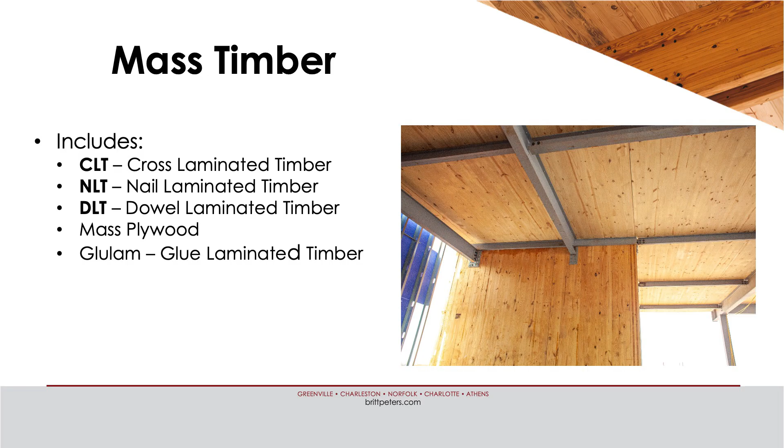So when I put this together, I don't think Laura was scheduled to speak, so she did a much better job than I'm going to do. I'm not going to rehash what she just said. But so what is mass timber? She went through a long slide of that, and I may throw in some additional facts. So skip some of this. So right now, again, maybe a little dated.

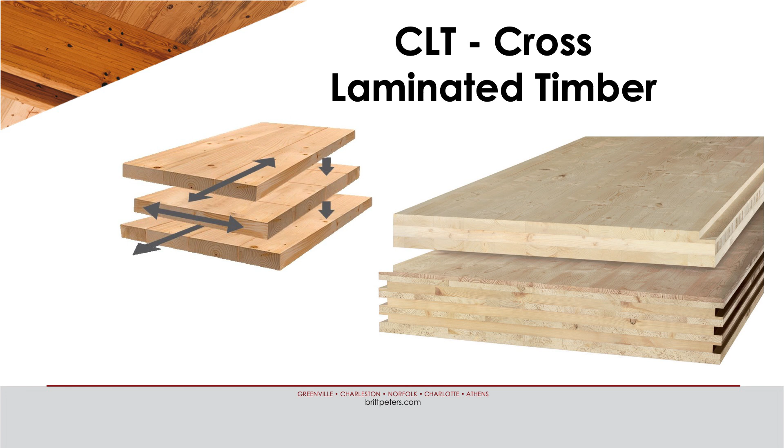So cross-laminated timber, she did a great job of explaining that. One benefit of CLT is the dimensional stability, unlike NLT, DLT, or what we deal with in stick framing. When I say dimensional stability, it means wood wants to shrink, especially perpendicular to its grain. So by alternating the layups, the panels do not shrink nearly as much as NLT or DLT.

And you can see it in the detailing. You'll see with an NLT panel or DLT, there'll actually be gaps that are left for that shrinking and expansion that you don't get with CLT. So we can actually butt them up next to each other and create the joints.

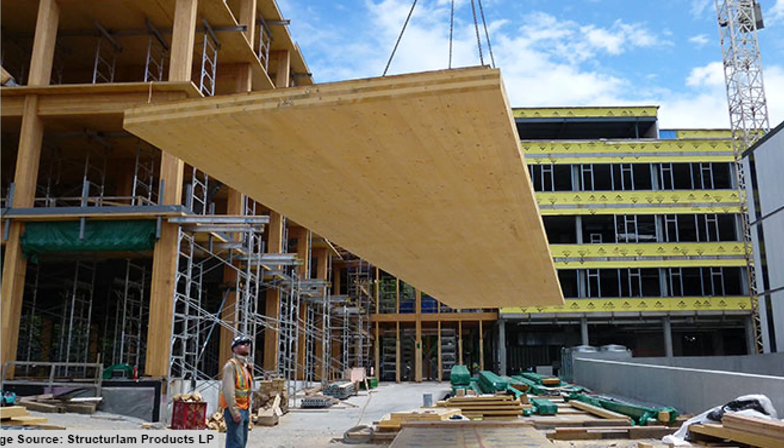They're large panels, or they can be, so up to about 12 feet, and you said 60 feet. And it's not every manufacturer. I think SmartLam is right at 50 right now, maybe just over, depending on their plant. But you know, they're large panels lifted in place.

NLT and DLT, I think we have one NLT project, and you know, a framer on site, you may not like the quality, but could put together NLT panels on site with a jig on the ground and lift them into place. We have one that we've done, and I'll go over it.

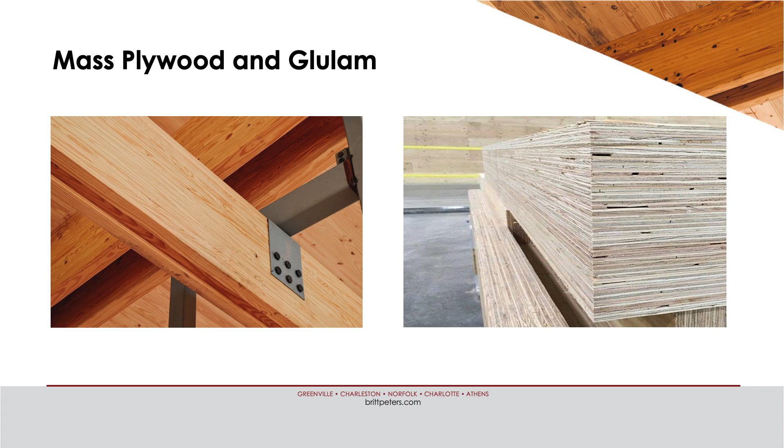Glulam and mass plywood. So I do think SmartLam has recently expanded their capabilities for their glulam, and they were offering to price a project with the floor panels being glulam and not CLT, just to look at the cost difference, because they can be a lot deeper now.

So now we'll jump into use in the Southeast. So I picked a handful of projects that we've done or been involved with in some capacity, just to show what is going on in this region. You know, Matt said we're lagging, but I think we're trying to quickly catch up. These projects date back to design probably around 2015-ish.

And one of our first is going to be the Calvary Chapel in Chattanooga, Tennessee. So this project, 8,500 square feet, small footprint. The contractor owner, I want to say they had 3 to 4 people on site that were working on this. They wanted to keep the workforce small. And this was full CLT.

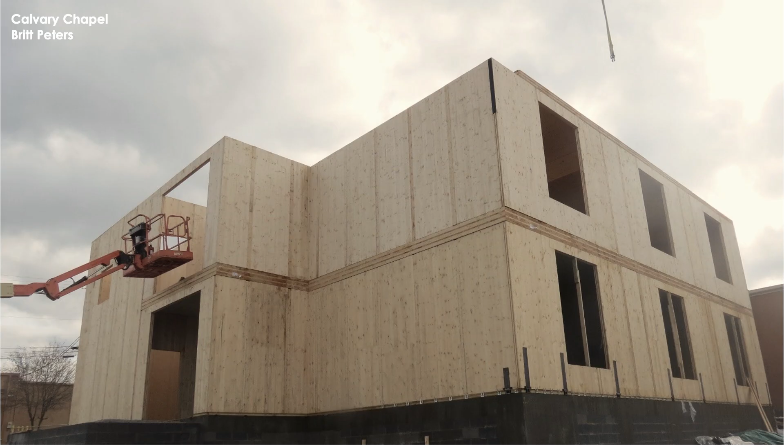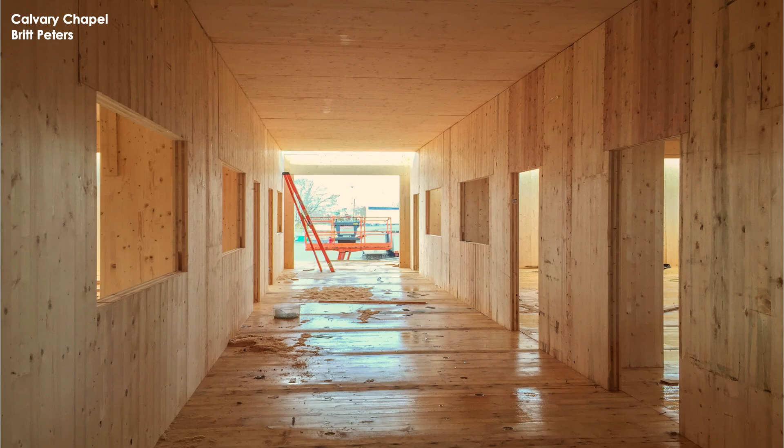Walls, floors, load-bearing CLT walls, everything. I do want to say there's 3 to 4 on site that erected this. So those glulams are actually non-load-bearing. They're for operable partitions. And the CLT actually just bears between the CLT walls. Beautiful building. This is a more finished look, topping slab. You know, those gaps on the side are for HVAC to run.

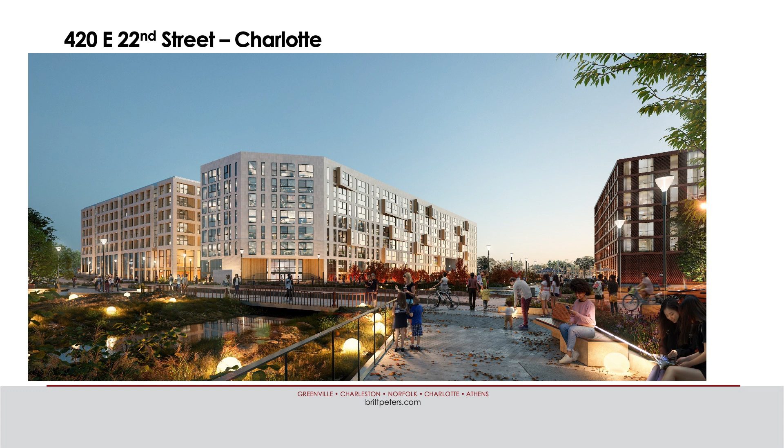We'll jump to a series of projects we have going up in Charlotte right now. So this is multiple phases. Right now there's two that have gone up; I think the second is going up right now. Multifamily mixed use. We do multifamily all over the Southeast, and these are unique because all the floors are CLT panels. They are not your typical 18-inch deep metal plated trusses with plywood. All of the floors are, I think they actually ended up being 3-ply CLT.

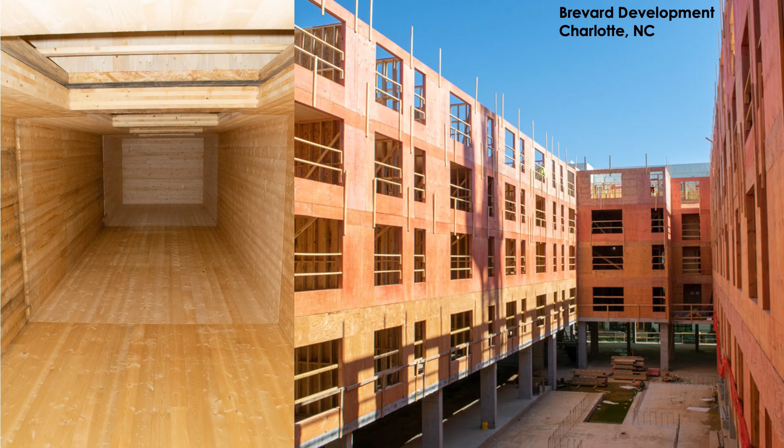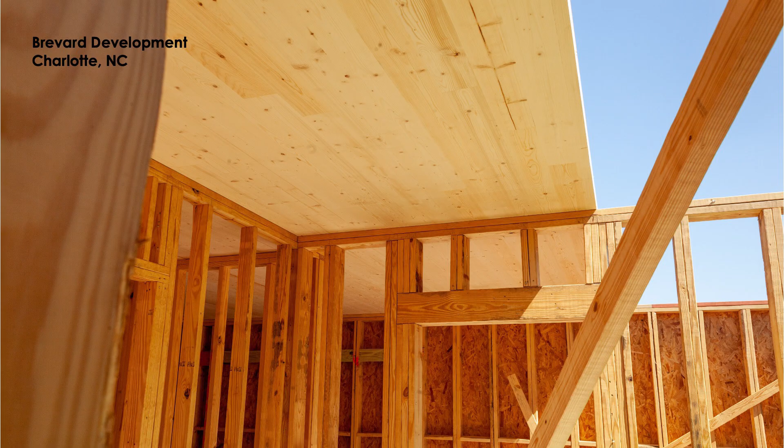Load-bearing walls, 2x6s, type 3. You can see the FRT exterior panels. The shafts are actually rated with char with CLT, so they didn't use what we would typically use masonry for those. One of the, with type 3, I don't know who's familiar with it, but especially with stick frame, becomes your exterior walls and getting those rated and FRT.

So this was actually in Mecklenburg County, which is notorious for being the hardest to get code compliant type 3 construction through. And so can you put the CLT panels in the exterior wall or not is something you have to work through with your code officials, because CLT is not FRT. It is combustible.

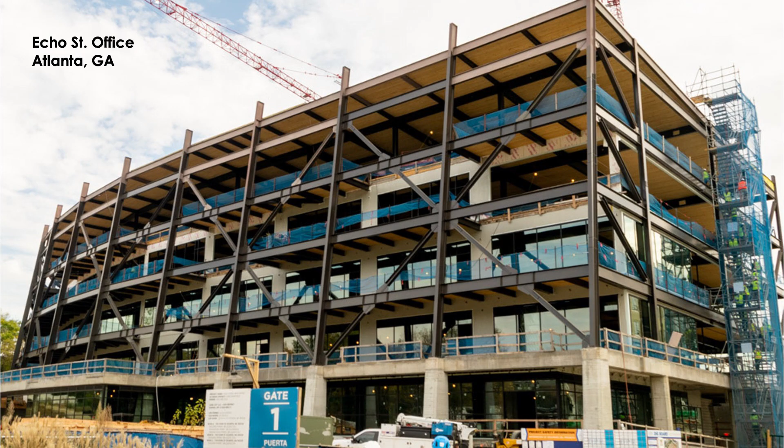Echo Street in Atlanta. So Britt Peters did not serve as EOR on this project. We were the mass timber engineer. I believe we worked with SmartLam, panel design, connection design of the panels. Again, a beautiful hybrid building, and I think I have another hybrid building coming up after this, but it's one of the areas where I see CLT and mass timber being able to push into the market quicker than the full mass timber building. And you can see here the openings in steel beams for HVAC.

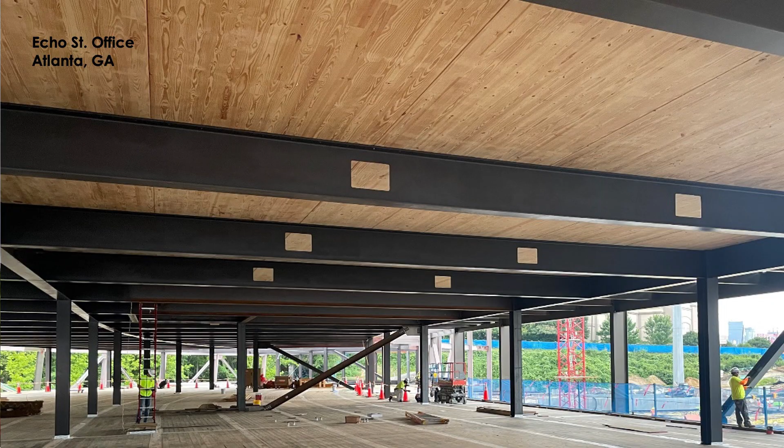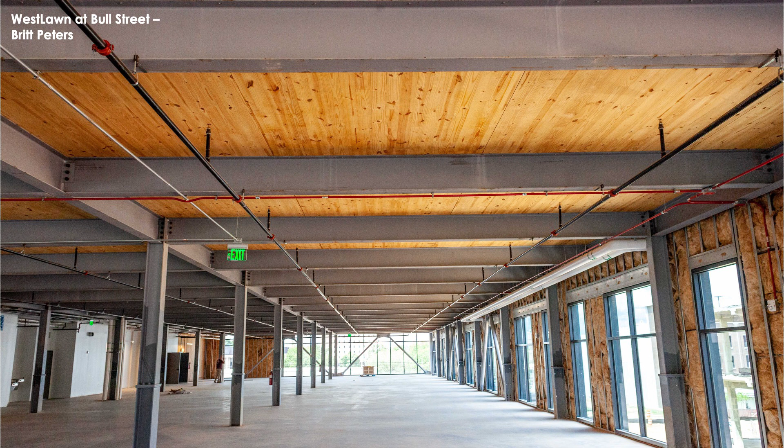And this is a similar building we did, this is in Columbia, South Carolina. So this is Bull Street. Again, this is a hybrid structure, steel frame, CLT floor panels. And I see it competing because of the price. I mean, the cost of this compared to a full mass timber building is a lot more price competitive, that we've seen.

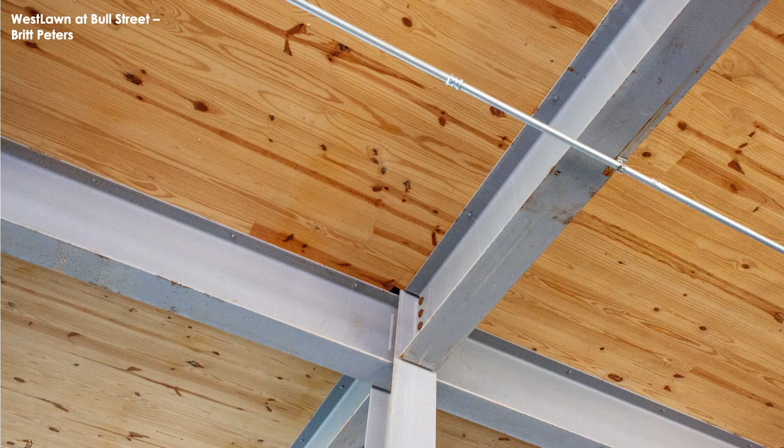So again, the steel, for this type, is unrated. So when we start talking construction types, you have to start thinking about fire ratings. And I don't know if contractors have ever priced intumescent paint. You don't want to do that. You're not going to be price competitive. You don't want to spray fireproof all these beams either. So it needs to be a construction type that allows an unrated primary frame. This in the end ended up black matte paint. You can see the connections from the CLT to the steel, fairly minimal screws. This one we actually had shafts that were CLT as well.

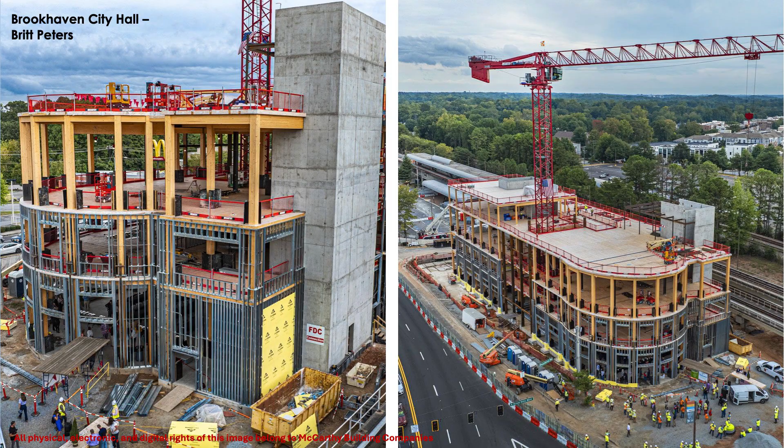Brookhaven City Hall in Atlanta. This is one of mine. It's almost full mass timber. There are some hybrid elements. The shafts are cast in place concrete. There were some longer spans. There's actually a big dome that is going on top that had to have some transfers that we had to work out. The roof here is going to be a green roof. The renderings have some fairly large trees on the roof. We'll see how they grow.

But this was all 1 hour rated construction. And so the detailing of getting that 1 hour is always, I would say, a detailing challenge we need to work through.

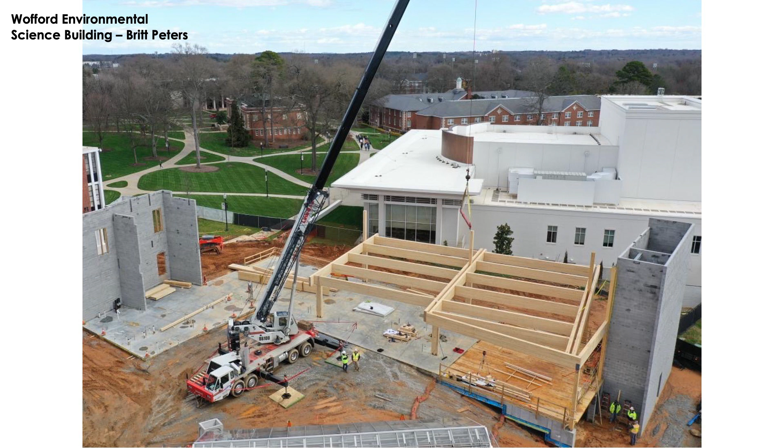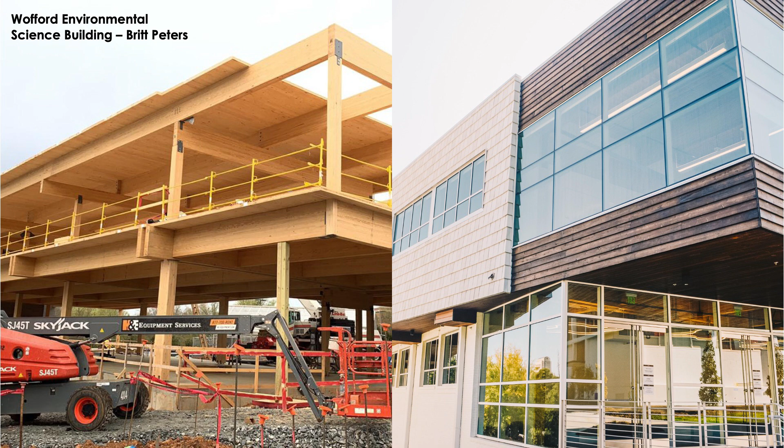This is at Wofford, so this is their environmental science building. This one, 2018, 2019, so fairly old at this point. This was almost a full mass timber building as well, except for some of the shafts. And this one, the geometry was fairly complicated. And so you can do a lot with mass timber. And this had floor plates that didn't align, double cantilevers on corners, a lot of utility line runs to work through.

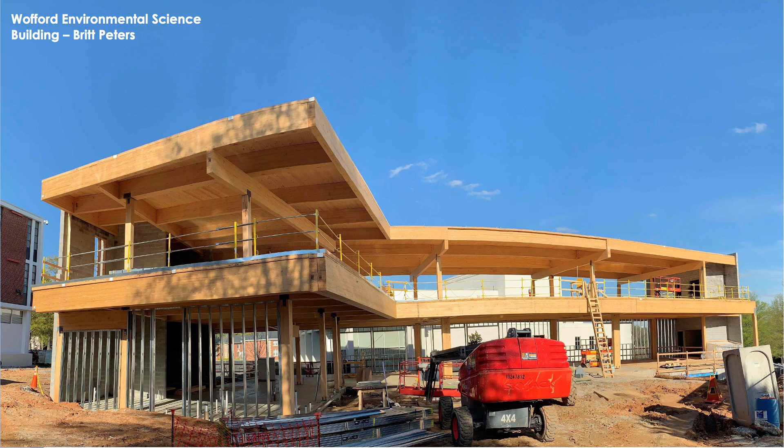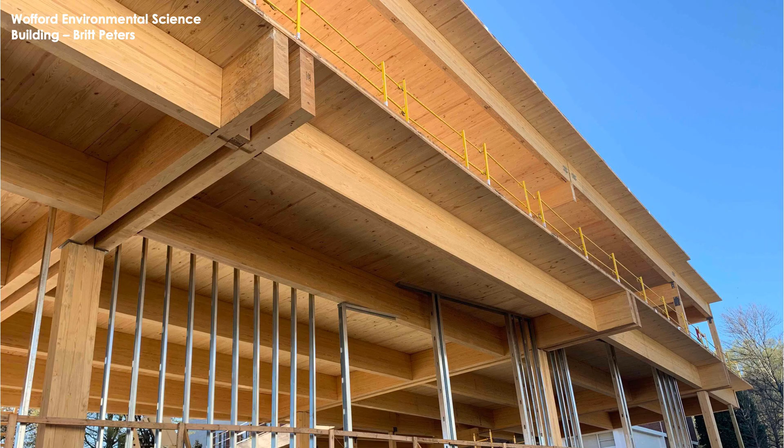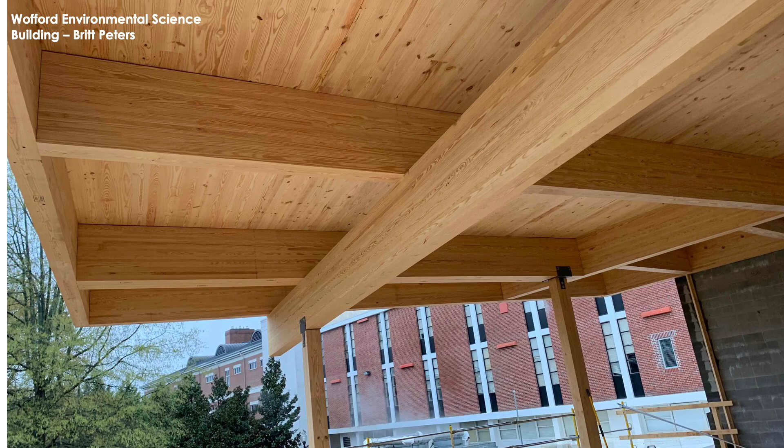Above the second floor, it's a lot of masonry veneer on this building as well, and supporting that off mass timber isn't always the simplest feat, especially considering long-term deflections of wood versus steel. So this is a more complete construction of this. Again, you can see the cantilevers and the bearing, the way we handled that at the columns. CLT floor plates, and this is where we overframed over girders for utility line runs. You can see that throughout the second floor here.

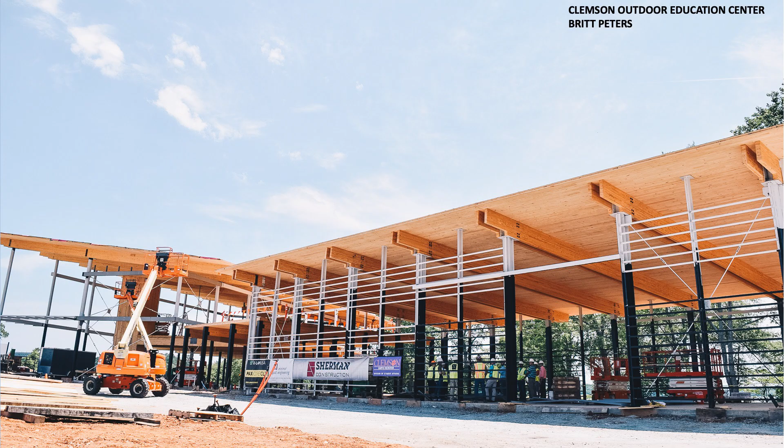Another university project. This one's been on pictures of a lot of magazines or websites. So this is the Andy Quattlebaum Outdoor Education Center at Clemson. It's a hybrid construction, but it's steel columns, glulam beams, CLT roof panels. I believe this was the first Southern Yellow Pine CLT building east of the Mississippi.

Elevator shaft CLT on this one, again, char rating as needed for the shafts. And I don't believe that's codified. I do think you need an exception from the building official to do shafts out of CLT.

But beautiful building. You can see a lot of this timber is, so this is Southern Pine, and it is not pressure treated. It is exterior. It is not subject to being wet, constant rain. It's on the underside, the soffits. You can see we actually held the beams back from the overhangs to mitigate the water, and you can see we capped the ends of the glulam to keep the ends from absorbing water.

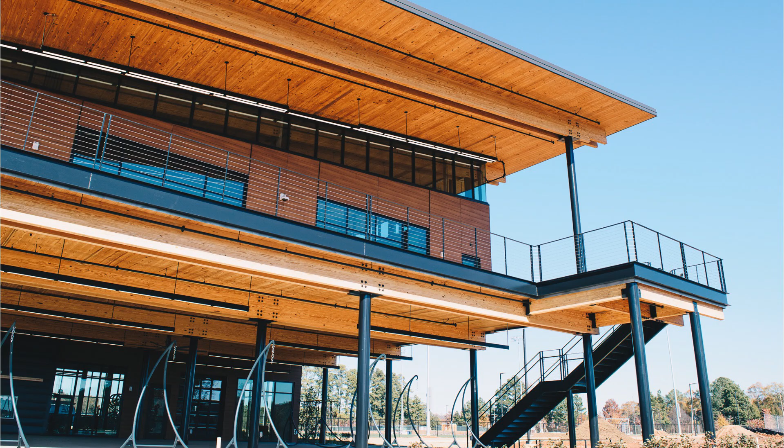If you go and look at it, there will be a color difference between exterior and interior just from UV. So it's something that I don't know if there's a solution to, but it doesn't take away from the beauty. But if you do go see it, that is why. So again, a lot of exterior timber here. Again, none of it is pressure treated. We held it back from rain, and we wanted to be sure it had the ability to dry out. That's the biggest thing.

I do think Clemson's doing some research where they have CLT panels just sitting outside to see what happens. And I think they may have been there 5+ years, and structurally they haven't noticed much. The big thing is you have to make sure it can dry.

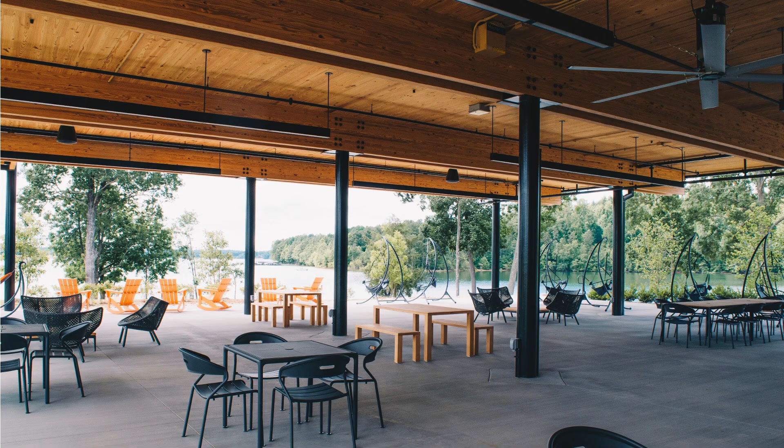So this one, structurally, we actually used moment frames that were built out of steel columns and glulam beams. There's an operable partition again where the track is inserted into the glulam beam for that space.

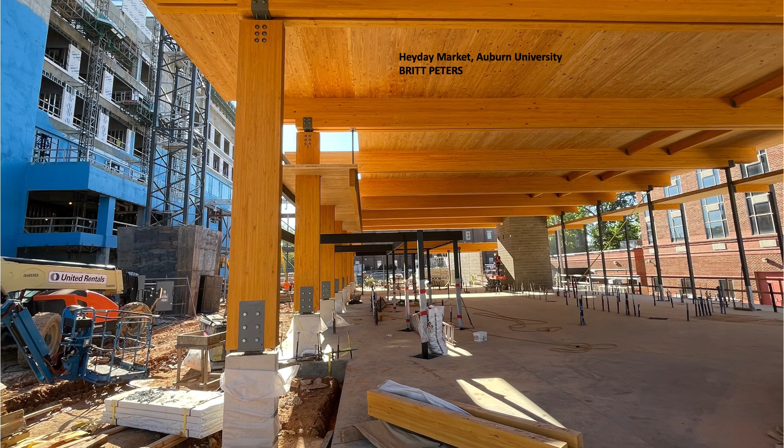Heyday Market at Auburn University. So this is part of their, I don't want to say culinary program, but it's essentially a food court. And we were consulting engineers on this. There are multiple phases or pieces of this project. We worked on the mass timber piece. And so this one, actually, the concrete bases were precast concrete pieces to hold the columns up, and glulam beams, glulam columns, CLT deck.

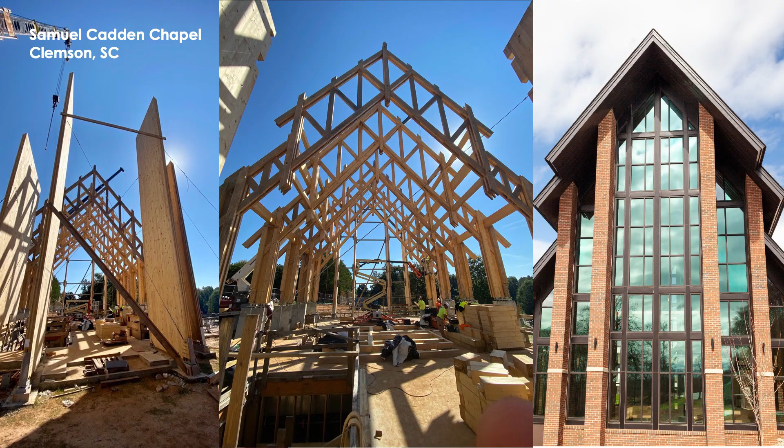And this is Samuel Cadden Chapel at Clemson, another Clemson project. Heavy timber, trusses, and CLT. Actually, the walls are wrapped. You can't even see the CLT. They're wrapped, but structurally they're utilized on this project. This is over a basement.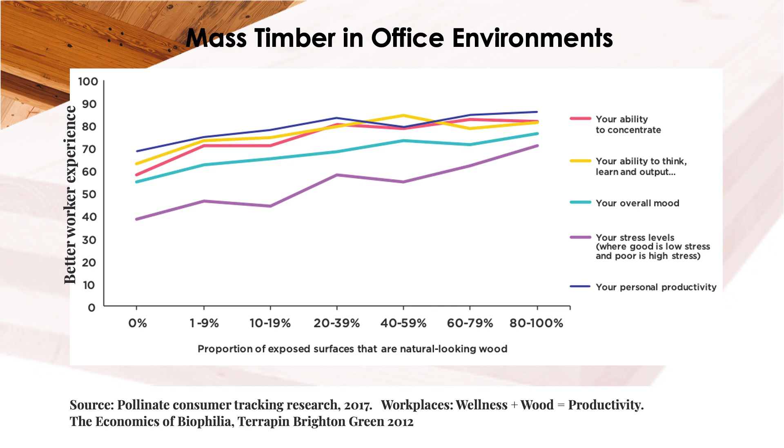So, structural engineering, I wanted to touch on some design challenges and benefits we see with mass timber. So as Matt said, I'm, hesitant to say it, material agnostic. I design with all types of material. And so why do we use mass timber? And the reason to me is I think it looks good.

Like, it's hard for me to convince an architect to let my steel beam be seen, but you're fighting the opposite battle with timber. Everyone wants it because of the look. I haven't met a developer or an architect that does not want to use it. And so I guess some scientists had to get together and explain that phenomenon.

And so this is a study, and it's touched on in biophilic design, but what is it? This was a study done with work experience versus amount of exposed natural looking wood in the building. And so you can see the more wood you're exposed to, the better working experience you have.

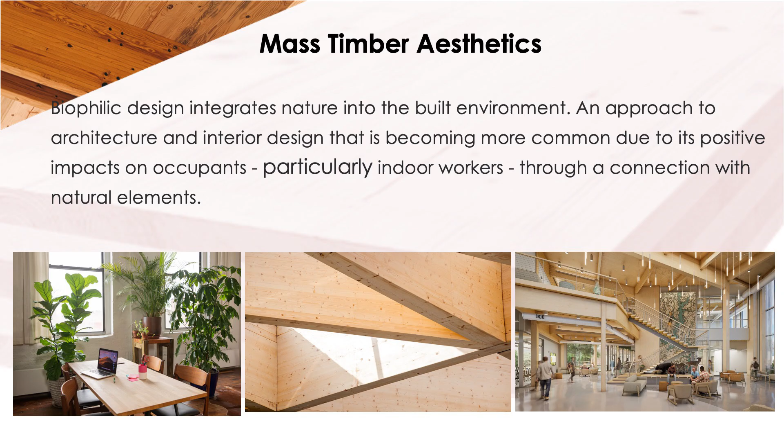And again, biophilic design integrates nature into the built environment, an approach to architecture and interior design that is becoming more common due to its positive impacts on occupants, particularly indoor workers, through a connection with natural elements. And Laura also mentioned the rental rates or lease rates and occupancy amounts using timber.

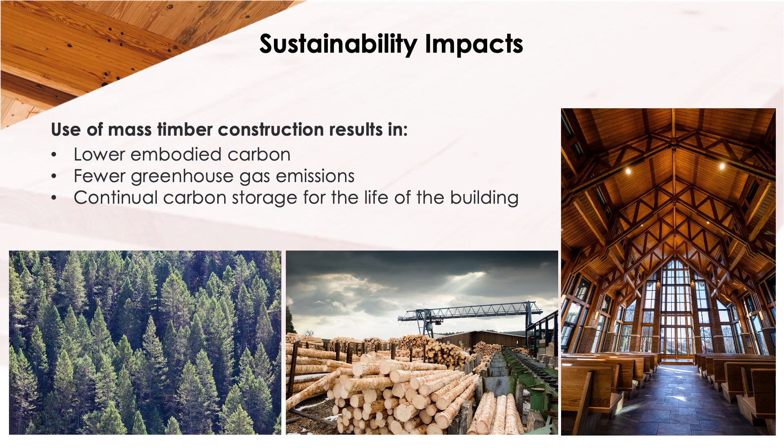So why? The other why would be sustainability. So there's actually Samuel Caden Chapel. That's the finished product. And sustainability, I think it's hard to argue against it. So it's lower embodied carbon, fewer greenhouse gases, continual carbon storage for the life of the building. And we did a life cycle analysis.

So this is a building we have going up. It's not in the south, it's at Western Michigan University. It's a dormitory, load-bearing, light gauge, cold-formed steel building. The floor plates are CLT. We did a study versus, I would say, a more traditional hollow core plank flooring.

And so this is cradle to gate, which is not cradle to grave. There's not an end of life in this. We didn't check foundations. We didn't check transportation. We said all that is equal, essentially because we didn't know what the end of life was, and we didn't redo the foundation design. So there would be more foundations.

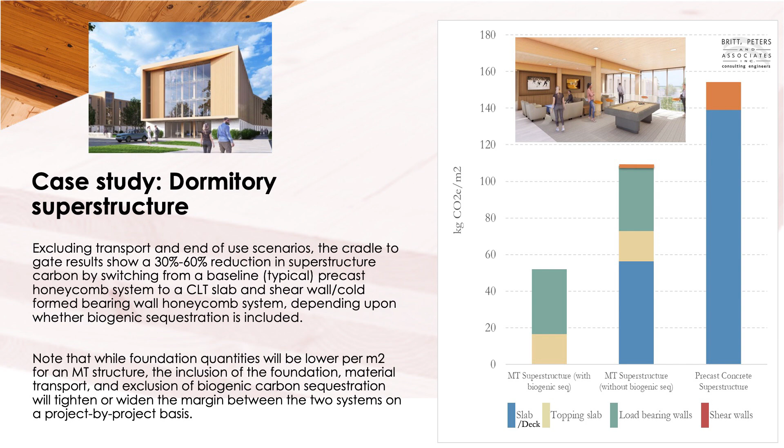But there's a 30 to 60% reduction in carbon when you go to CLT for this particular building. And 60% is if we consider the carbon sequestration, which would more consider the end of life, as in, that building is holding the carbon, versus if we didn't consider it, it's still a 30% reduction versus the hollow core plank option.

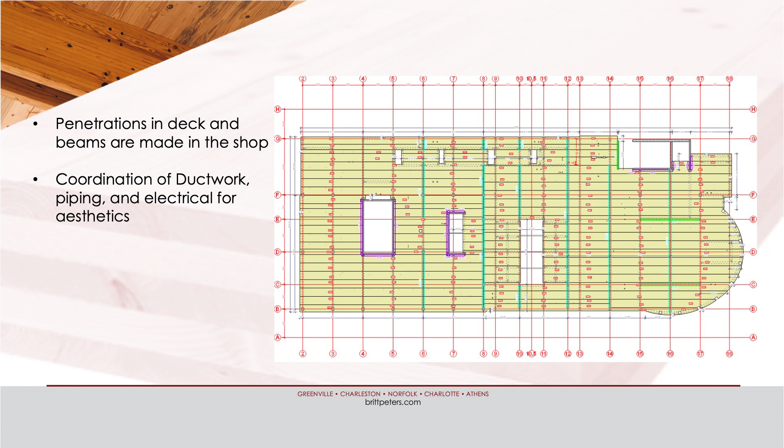This is Brookhaven City Hall. It's just a CLT shop drawing. This building actually had access panel floors, so basically all the utilities were between the access floor and the top of the CLT. So underneath, you didn't see duct runs, you didn't see plumbing lines, you didn't see electrical, and the slab penetrations had to come through. But when we're reviewing shop drawings at that early stage, those openings need to be in the panels or the beams in the shop and not in the field.

With a concrete slab on metal deck, we don't see any penetrations on the shop drawing. They put them in the field, and we have some typical details to put some extra rebar around it, and they go. So making sure everything is coordinated prior to getting this stuff to the field is vital.

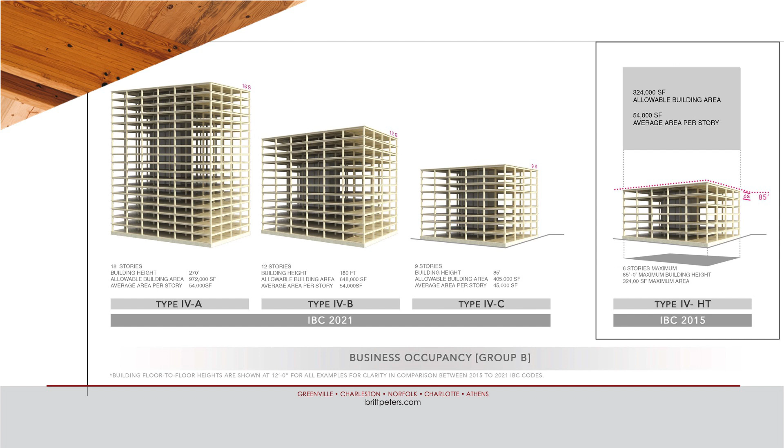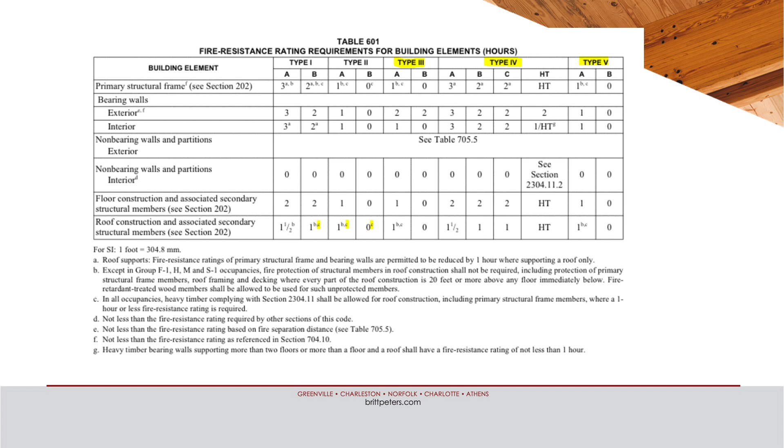Laura again talked about construction types. I won't dive into it too much, except to add, you know, Georgia's adopted Type 4, which is great. All the tall Type 4 provisions. Not one structure I showed was Type 4 construction. They're all Type 3 or Type 5. So just because Type 4 is there, I think if you're an architect, you need to know all the requirements of Type 4 beyond just this. Historically, we've always kind of been in that Type 3 or Type 5 construction.

I just want to point out, you know, we're talking about fire ratings. I don't know if there's a, I'll probably cut it off. I'll try to use this. No.

The primary structure, so it has a 1, a 3, 2, 2, 1. So those are all your fire ratings. I will say, if you're dipping your toes into the mass timber world, when you see the price difference of a 0 and a 1, I think it can be a little eye-opening. I don't know everyone's budget, but when we see clients saying, oh yeah, let's look at mass timber for this, and then they're Type 3A, we kind of know that's a sign that it's probably not going to happen.

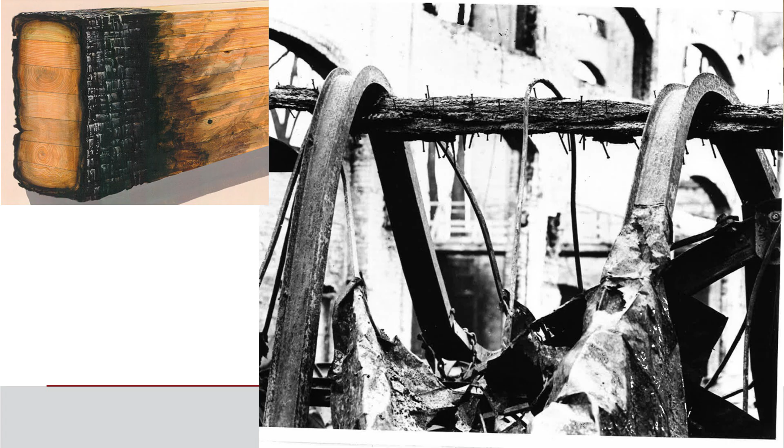So the architects and your designers, the way your building footprint and your heights and all of these things play into where you can classify your building. So trying to get it to fall into one of those with a 0 or even the HT is always cost effective. It can be done, and mass timber does have a char rating, and we can get a fire rating with it. But again, it's an added material. So you design it, and then you just increase your piece sizes to get there, and you have to conceal all your connections.

So anyway, there's additional resources. So WoodWorks, great, Laura's here. AWC, Clemson, again, has done a lot of research.